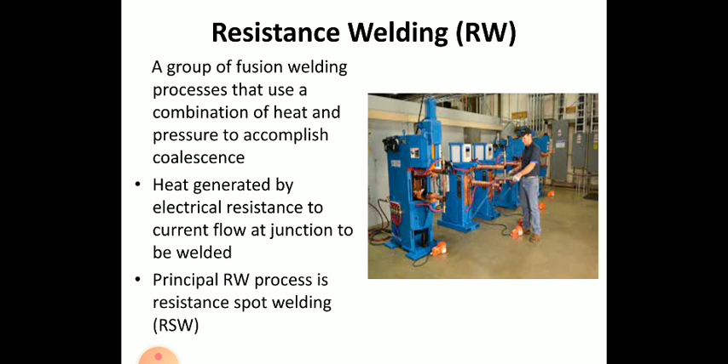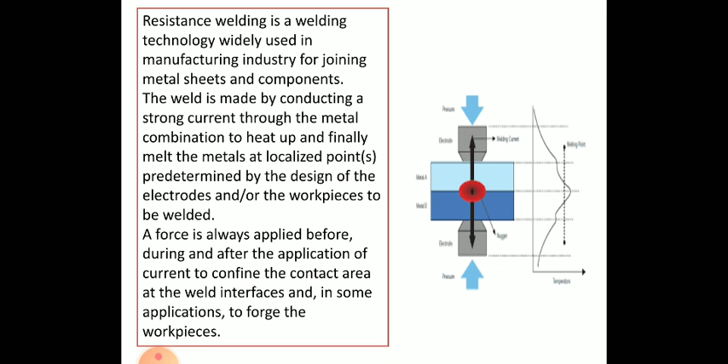So that is resistance welding. As you can see, the particular electrodes are focused at a point, and when the current circuit is completed, that point is initiated with heat, localizing the coalescence of the material, and a weld nugget is created. As you can see in the figure, there is a weld nugget and the sheet metal part to be welded.

So the positive and negative force is applied from the electrodes on these components in this particular group of processes. The working principle of resistance welding is the generation of heat because of electric resistance. Resistance welding types such as seam, spot, and projection work on the same principle, and the things are very similar, but there are various types.

Okay, so what we were talking about is the types of resistance welding.

तो सिंपल फंडा है, जब करंट फ्लो करेगा इलेक्ट्रिकल रेजिस्टेंस जनरेट करने के लिए, तो जहाँ दो इलेक्ट्रोड पॉजिटिव और निगेटिव टर्मिनल को फॉलो करते हैं, बीच का जो मेटल है वो उसको रजिस्ट करता है। रजिस्ट करने की वजह से उस पर्टिकुलर एरिया पे हीट लोकलाइज होना शुरू होता है।

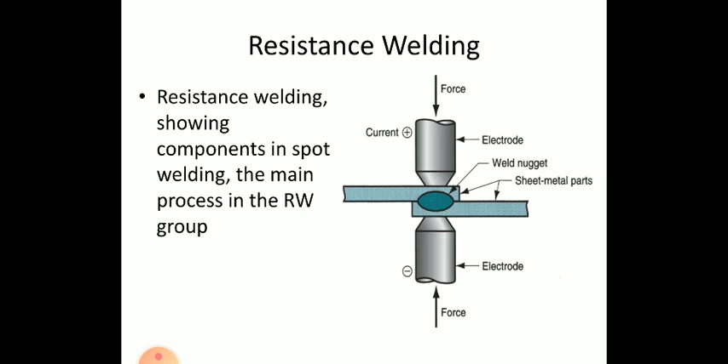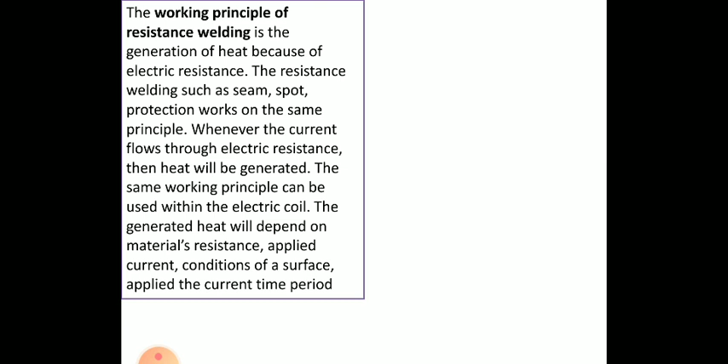Due to that, the local heat is generated and the particular welding is completed. So that is the basic funda of how this particular welding is to be happen. A very simple but very efficient work is to be happen.

So how that heat generation is taking place, and on which behalf that particular criteria is to be fulfilled, that we need to take care. So there is a formula of that particular resistance welding, that is H equals I square RT, where H is the generated heat.

Heat कहाँ से जनरेट हो रही है, इलेक्ट्रोड से, और रजिस्ट कौन कर रहा है, वो पर्टिकुलर मटेरियल। The unit of that heat is in joule, and I is the electric current, with unit ampere, and R is the electric resistance, with unit ohm. T is the time of current flow, with unit second.

And the generated heat can be used to soften the edge of the metal to shape a tough welding joint with the fusion, and due to that generate the weld with no application of any flux, filler material, and shielding gas. So that is the basic difference between these two categories of welding.

एक वेल्डिंग ऐसी थी जिसमें हम लोग तरह तरह के वेल्डिंग फिलर को यूज़ करते थे, फ्लक्स को यूज़ करते थे, वो उनकी रिक्वायरमेंट के हिसाब से।

बट अब क्या है, थिन शीट को अगर हम वेल्ड कर रहे हैं तो उसमें हम ना ही फ्लक्स को यूज़ कर रहे हैं, ना ही फिलर मटेरियल को यूज़ कर रहे हैं, बल्कि सिर्फ और सिर्फ इलेक्ट्रिकल रेजिस्टेंस को यूज़ करके उस पर्टिकुलर लोकेशन को हम ज्वाइन कर दे रहे हैं।

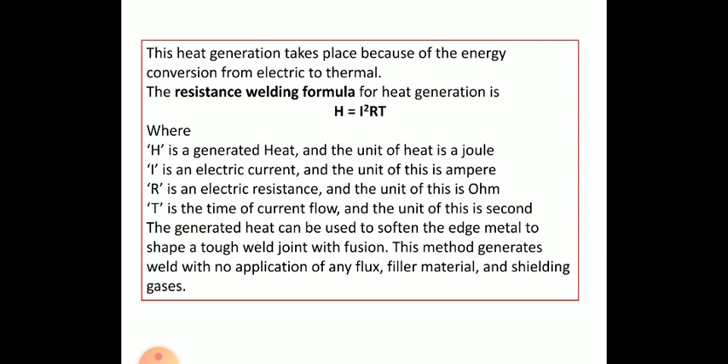And where the heat starts generating, where the electrical resistance starts their work, that particular location, as you can see, the heat is locating on that particular workpiece. Due to the work pressure, the force which is applying also, it combines both the materials with the help of heat and force.

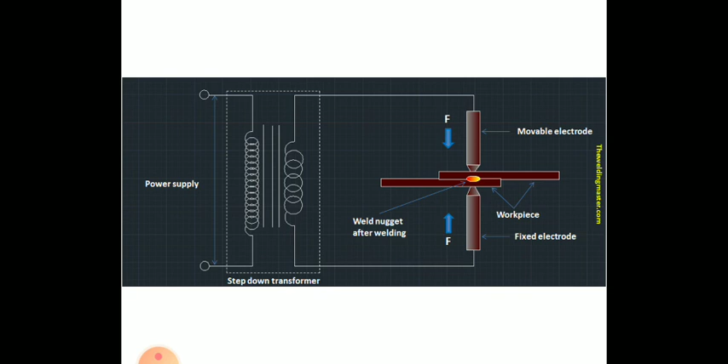So that is the basic funda utilized to join the particular materials or sheets. These are the very basic techniques that you are utilizing. So the components utilized in this spot welding are: the part to be welded, two opposing electrodes where pressure is applied, squeezing the part between the electrodes, a power supply controlling the current, and the applied specified time duration as well.

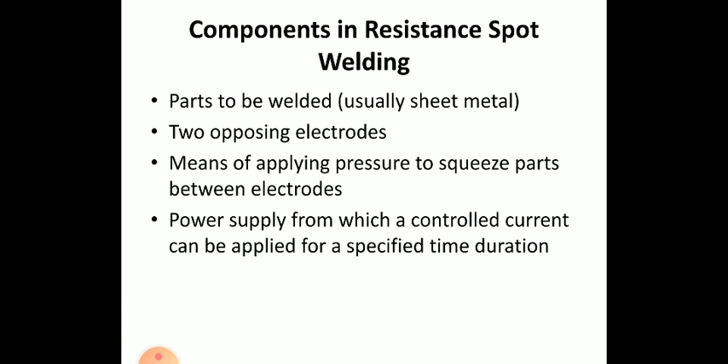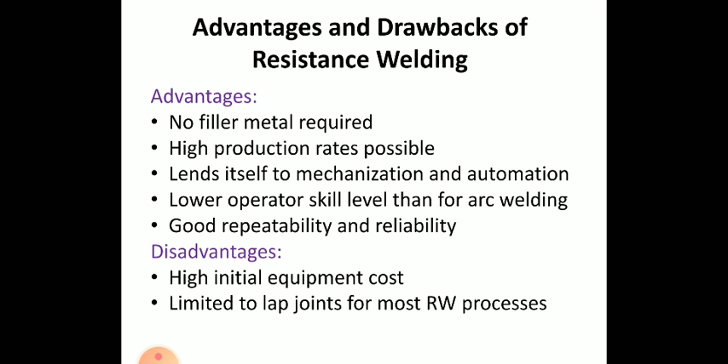तो लैप जॉइंट जो आपने देखा, एक दूसरे के ऊपर उस शीट को रखते हैं, that is leading to the lap joint, right. So these are the basic advantages and disadvantages.

Now let's focus on this particular resistance welding in detail, this resistance spot welding. Now we are going to discuss one by one how these resistance welding are categorized and what is the basic concept behind how this particular spot welding happens.

So resistance welding is a process in which fusion of faying surfaces of a lap joint is achieved at one location by opposing electrodes, as you saw in the figure. They are used to join sheet metal parts, widely used for mass production of automobiles, metal furniture, appliances and other sheet metal work.

तो बेसिकली ये जो रेजिस्टेंस वेल्डिंग है, ये शीट मेटल वर्क के लिए ही अप्लाई किया गया, और ये शीट मेटल का काम हम ऑटोमोबाइल सेक्टर में भी यूटिलाइज करते हैं। So typically the car body is having kind of 10,000 spot welds.

सो दैट इज द मॉडिफिकेशन इन द वेल्डिंग प्रोसेस टू ज्वाइन द थिन शीट। पहले के टाइम में उनको जोड़ने में प्रॉब्लम होती थी, बट जब से रेजिस्टेंस वेल्डिंग आया ये सारी चीज़ें ओवरकम हो गई। So annual production of automobiles in the world is measured in tens of millions of units.

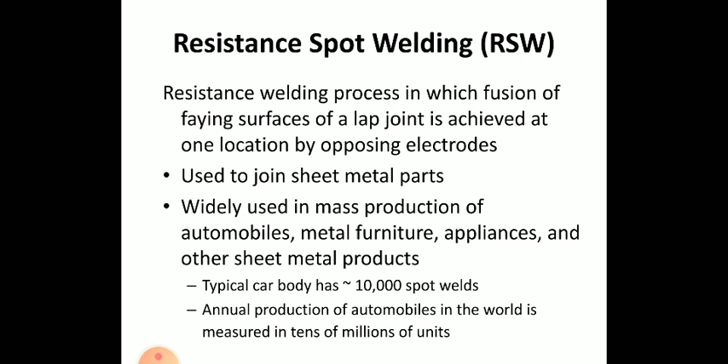So that particular units are joined by this particular advanced welding technique. So you can see there is a figure showing over here, the spot welding. It's a very simple kind of welding operation where the work portions are held jointly below the force of the anvil face.

As you can see, the notch of the particular electrode is holding the workpiece at a point, and so the weld happens. So the copper electrode is utilized in this. इसमें कॉपर इलेक्ट्रोड को यूज़ करते हैं जो कि वर्क पोर्शन से कांटेक्ट करता है और उसको purpose करता है, and that leads to the flow of current as well.

The work portion material applies a little resistance, right? So that affects the current flow. तो ये जो वर्क है, वो रेजिस्टेंस करता है मटेरियल को पर्टिकुलर फ्लो होने से, and that particular resistance is leading to providing a kind of current flow and providing a kind of heat production. So we can...

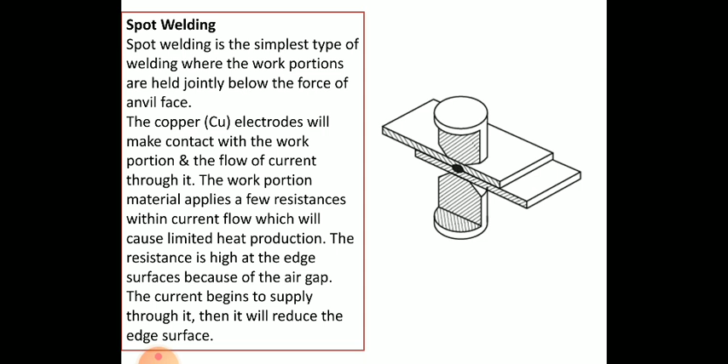यस, सो हम बात कर रहे थे इस पर्टिकुलर स्पॉट वेल्डिंग की। So the resistance is high at the edge of the particular surface because of the air gap, and as the current begins to supply through it, it will reduce at the edge surface, right? So that is the spot welding.

As you can see, this is the graphical representation, and this is the picture frame of that spot welding. So you can understand how this welding is happening. So this spot welding is a resistance welding process used for joining metal sheets by directly applying opposing forces with electrodes with pointed tips.

अच्छा, इस इलेक्ट्रोड का भी बहुत रोल है। ये इलेक्ट्रोड चूँकि हीट को रजिस्ट करता है, हीट को सप्लाई करता है, तो इसको भी मेंटेन करने का काम होता है, तो उसको हम लोग बाद में क्लास में डिस्कस करेंगे।

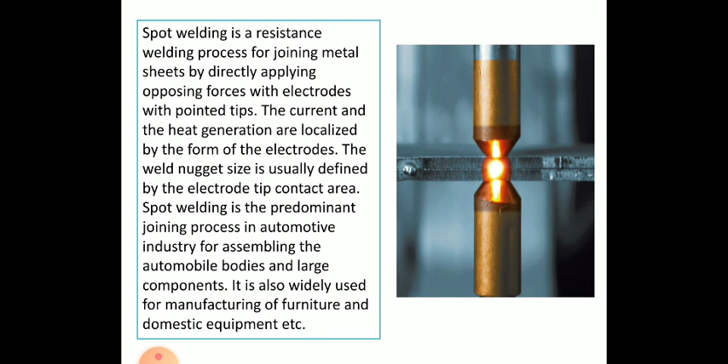आप इस फिगर में राइट हैंड साइड में एक छोटा सा स्पॉट देख सकते हैं, that is basically the spot welded portion of the weld piece, right? So you can see the particular location of that area. Let me show that, yeah, that area is showing over here, locating the particular welded spot portion, right?

So that happens, and the next portion is welding in front of you, so that the current and heat generation are localized from the electrodes, and the weld nugget size is usually defined by the electrode tip contact area as well.

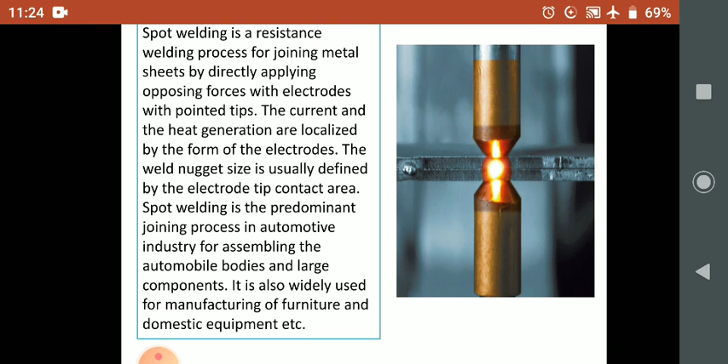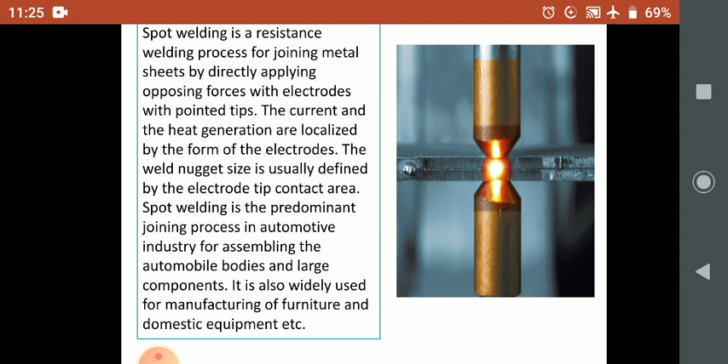So this spot welding is the predominant joining process in the automotive industry for assembling automobile bodies and large components, as we discussed earlier, right? So this is the basic concept of this particular joining process being utilized. This is a very interesting point of spot welding, and these are the step by step procedures.

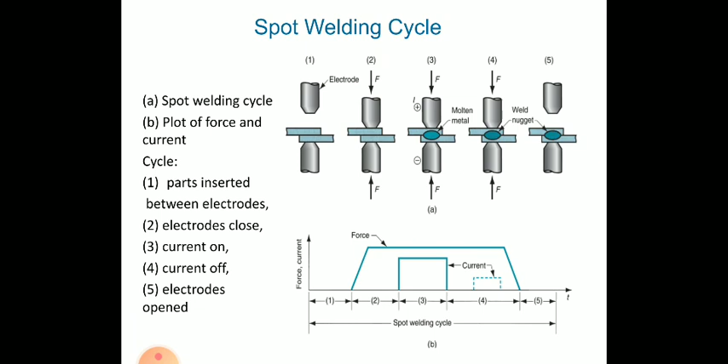That's why we are focusing on this particular location. This is a very important thing to understand, and there are other variants of this welding operation as well, so let's see which kind of things are available for us.

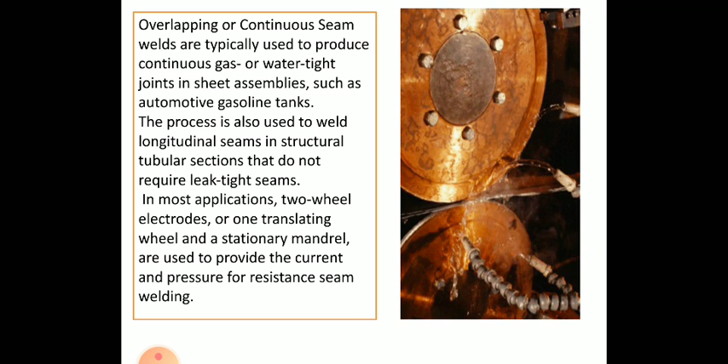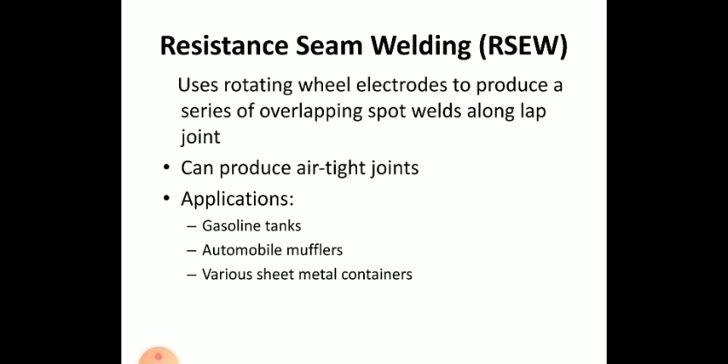For most applications, two wheel electrodes are used, or one translating wheel and a stationary mandrel are used to provide the current and pressure for resistance seam welding. The rotating wheel electrode is used to produce a series of overlapping spot welds. Applications include gasoline tanks for producing airtight joints, automobile mufflers, and various sheet metal containers. These are the basic applications of this seam welding process.

This is another view of resistance seam welding, accomplished to join sheets in a series of spot welds, so we can maintain the particular system.

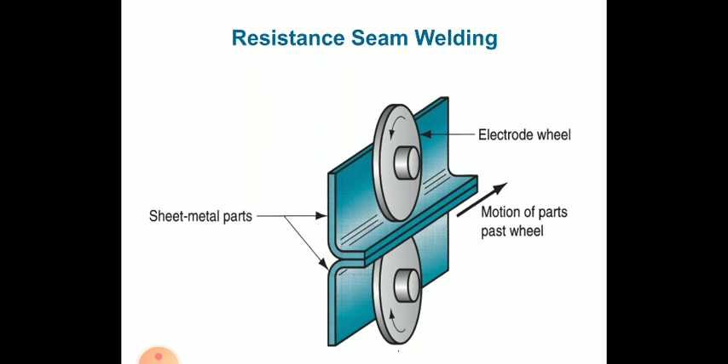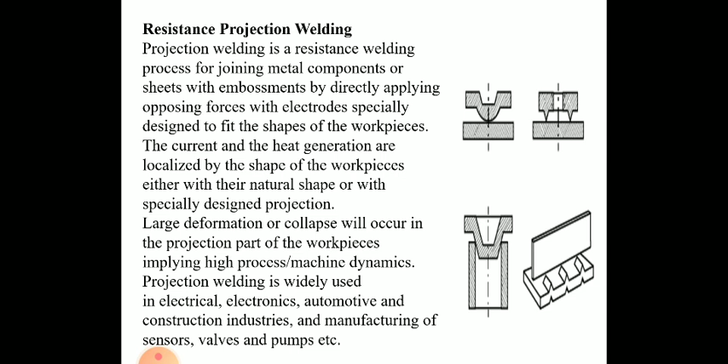So you can see how these projections are welded. At the start of the operation, contact between the part and the projection occurs, and when current is applied, weld nuggets similar to spot welding are formed at the projection.

So you can see the sheet metal part having projections, and that projection is to be focused, and the welding is to be accomplished. This is the kind of thing we need to discuss here.

In a later class we will discuss the various parameters that influence the quality of the weld happening on the metal sheets. So in the later class we will discuss this, right?

So these are all basic resistance welding operations working the same way, utilizing heat and applying pressure, so the weld is accomplished on various thin sheets, helping the automobile sector in a very efficient manner, as well as the marine sector and electronics industries.

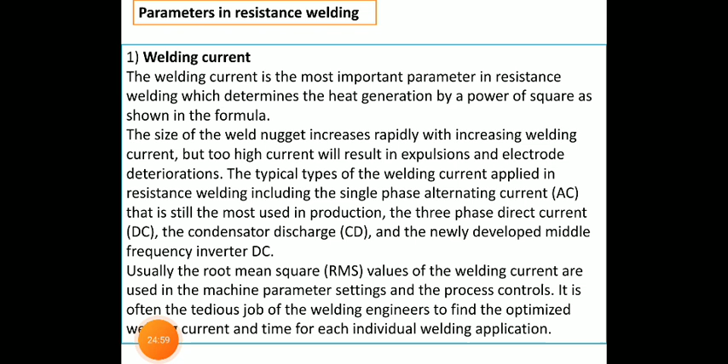These are very precise and advanced techniques that are utilized for joining materials in a very efficient manner. That's why these conditions are used for application of the particular welding operation. We will discuss these parameters in a later class, right?